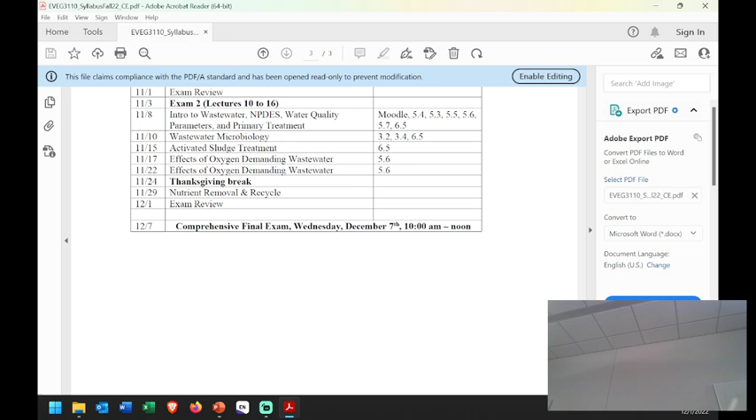Okay, so I think that should be correct. Any doubts, you can always check the LSU website.

All right, so with that, any questions you'd like me to answer? Any topics you'd like to have some review on or anything? Okay, if not, I'll just jump straight into the homework solutions, and then you can get about your studying and everything.

Okay, so problem 1, we have a wastewater treatment plant using an activated sludge system. For primary treatment, 0.350 cubic meters per second of primary effluent. So what we're talking about there is we have some primary treatment, which usually is like the bar rack, sedimentation chamber, kind of the first steps. Then we take that into our secondary treatment, which we consider the aerated tank, waste activated sludge. Usually this sludge just kind of goes to waste or to possibly... yeah, we're just not going to talk about that, it's not relevant. Okay, so this is our typical system.

That means the primary effluent is this stuff coming in here, right? So this is the primary treatment, this is the primary effluent, and that's what we're talking about. So from here, we're given Q is 0.35 cubic meters per second. The mixed liquor, that's referring to X inside here, that's 2,500 milligrams VSS per liter. We're also given the RAS, the return activated sludge concentration, so XR is 10,000 milligrams per liter. We're also given the substrate concentration of the primary effluent, that would be S influent, that's the 220 milligrams per liter.

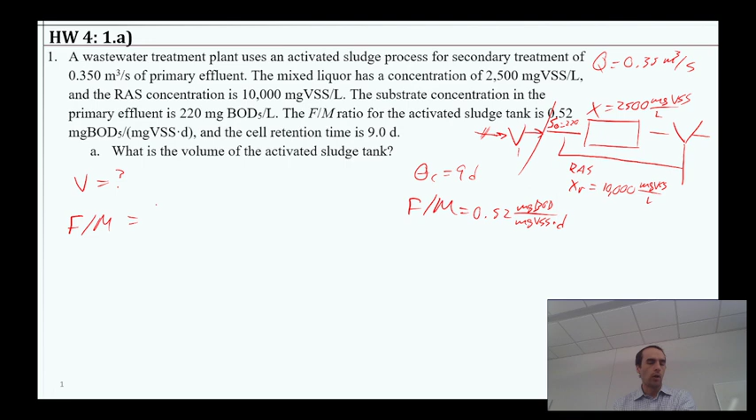Okay, so with all that, part A is asking what is the volume in this tank. And if we take a look, we have in our F to M equation a pretty handy way to calculate that. So it's our equation for the food to mass ratio. Essentially, it's how much food is in this tank, right? So the volume of it will matter. This is Q times that incoming substrate divided by the volume times X.

So we can simply rearrange and say the volume is equal to Q S naught divided by F/M. Now remember, this is just one variable here. We're not multiplying by M, dividing by F, any of that. We're just keeping it F/M right there.

So then with that, we can put in our terms. 0.35 cubic meters per second times that 220 milligrams per liter BOD, divided by that 0.52 milligrams BOD per VSS.

Per day. And here on the bottom, we also have that in days, so we need to convert that to seconds, or this one to days. But we also have that X concentration we were given, 2,500.

Milligrams VSS per liter. Looking at the units, we still need to convert to get like terms for the time. So I'm going to multiply the top here by how many seconds in a day? 86,400 seconds per day. That'll get us per day units there.

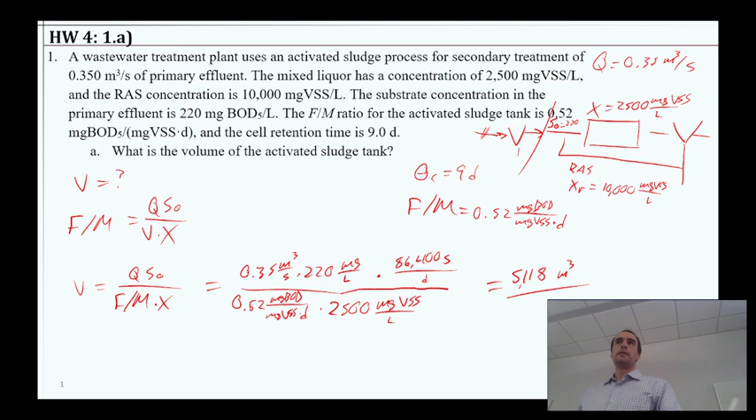Once we put all that in, our volume should come out to 5118 cubic meters. All right, so pretty simple to start with.

Part B says, what is the waste-activated sludge flow rate? So again, just going to draw this up real quick. So what we're looking for is the QW here. That's the question, the flow rate for the waste-activated sludge part. So we're wanting to solve for that.

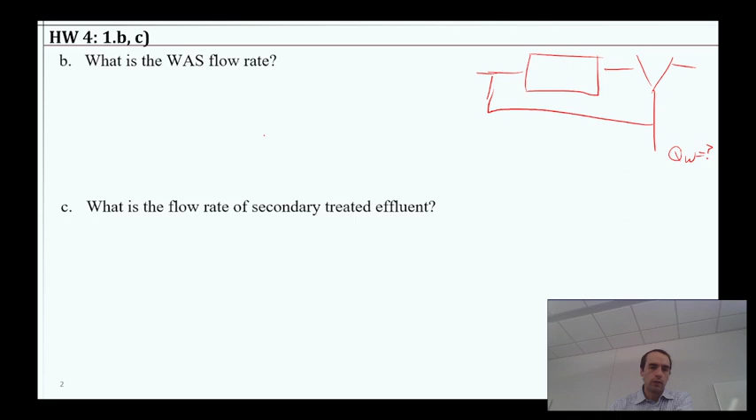We are given a lot of the other things. We have an equation, theta C, if we were to take a look at our equation sheet, that has some information here. So theta C, we know is 9 days, but the equation we're given is Vx divided by QW times XW. So we have basically everything there.

We can say QW is going to be Vx divided by theta C times XW. Now we don't have directly XW, but we were given XR at 10,000 milligrams VSS per liter. And that should be the same exact thing as the XW, right?

So if we have some amount of bacteria concentrated here, it flows down, it splits into two directions. There's nothing that's going to change the concentration by sending it through two different pipes.

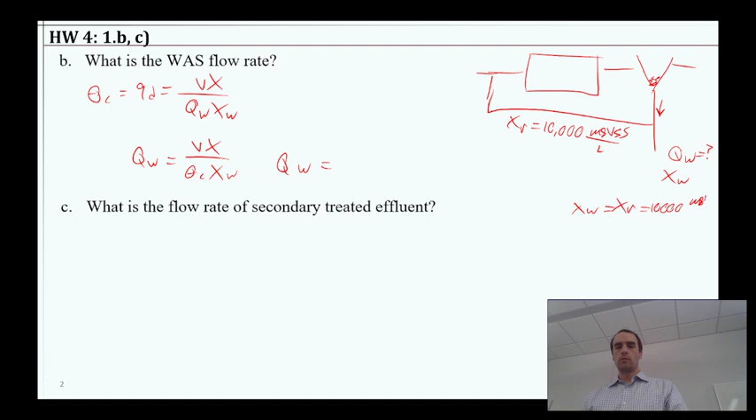So with that, then we can put in the numbers here, and QW, so let's go ahead and just write that out explicitly here. So XW equals XR. So QW then would be 142.2 cubic meters per day.

Since the next question is going to ask us to deal with flow rates again, I'm going to go ahead and convert that to seconds and say that's also 0.00165 cubic meters per second.

So again, I think the major complication for any of these types of problems is probably going to just be understanding the variables, where they go, what they mean from the wording.

Okay, so part C, we say we have what is the flow rate for the secondary treated effluent. So what we're talking about is the effluent here going out of that reactor. It's not going into a landfill. That's what we would be discharging. So QE is the question.

And we know that essentially if Q is coming inside here, we have some Q recycle here. We have QW and QE. Well, Q has to be, since the recycle is kind of internal, Q is going to be QE plus QW.

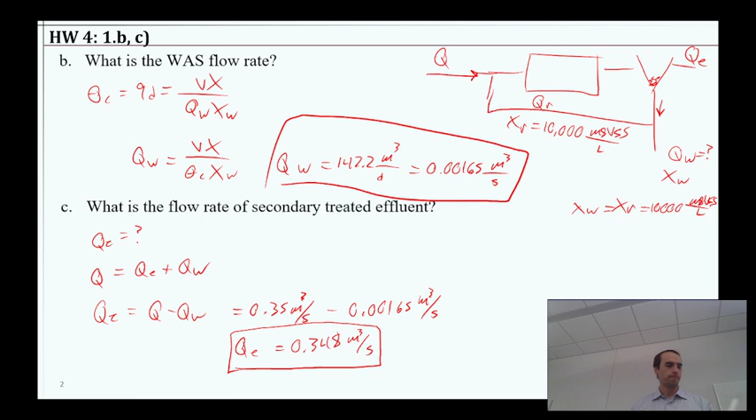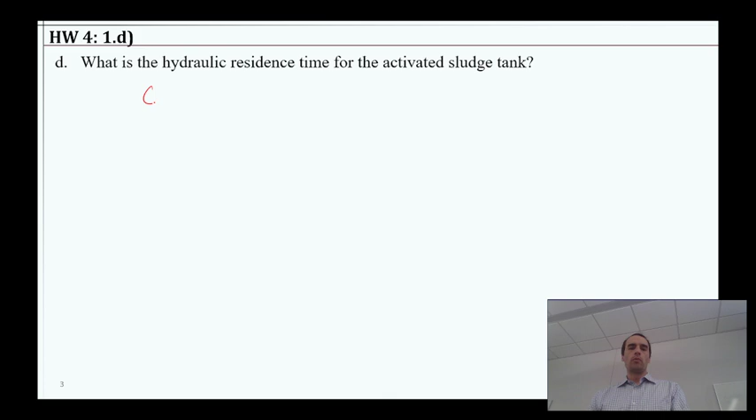All right, so part D says what is the hydraulic residence time for the activated sludge, and we remember that when we're talking about, in this case, it's V over Q. It's definitely not the same thing as theta C, right? It's two different things here. The one's the solids, or the cells, the bacteria cells.

So when we consider our system, there's possible confusion here with the fact that we have recycle, right? So if we have Q and QR going into our tank, you might think to yourself, well, why is this Q, why are we using Q, not Q plus QR?

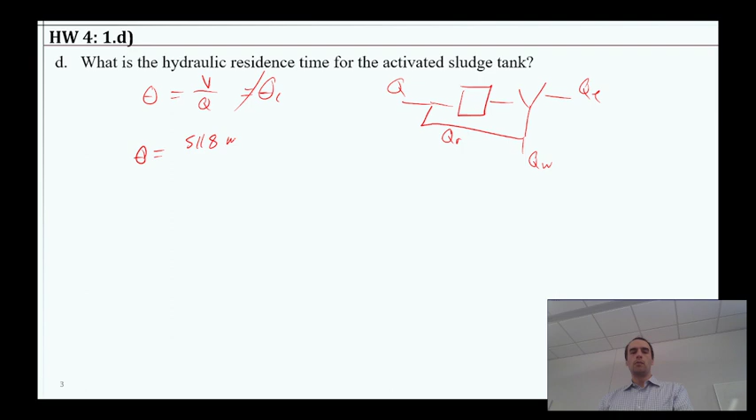Because the answer here should be that 5118 cubic meters divided by our 0.35 cubic meters per second. We can convert that to days if we like.

1 day per 86,400 seconds. This theta is going to be 0.169 days.

The reason we don't have Q plus QR is because essentially all of the volume where we have a reaction happening is here. This volume in terms of reactions is zero elsewhere, so we don't have any important volume there. If we draw a control volume like this, the only space with reactor stuff happening is in that reactor, and the only flow going through it is Q.

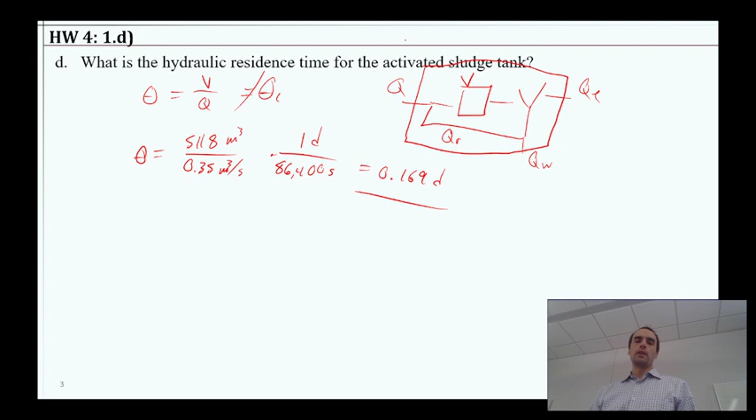Another way to think about it is that QR is adding flow going through the system, but that amount of flow is also coming back around again. That same amount of flow that gets added every time, sees it again every time, so it kind of equals out that way. That's just a little explanation for why we use Q, not the addition of Q and QR.

All right, any questions, issues there?

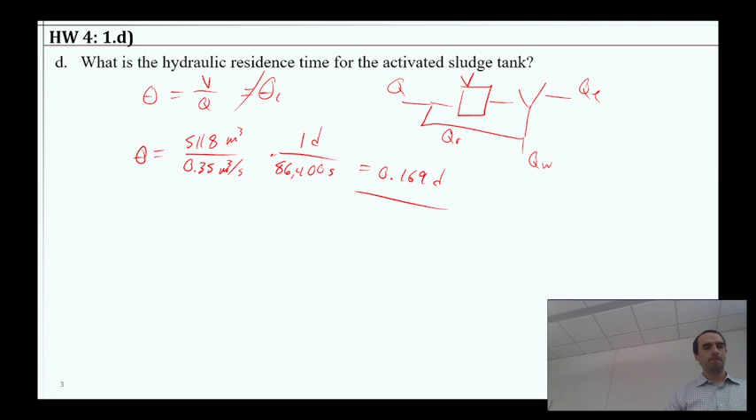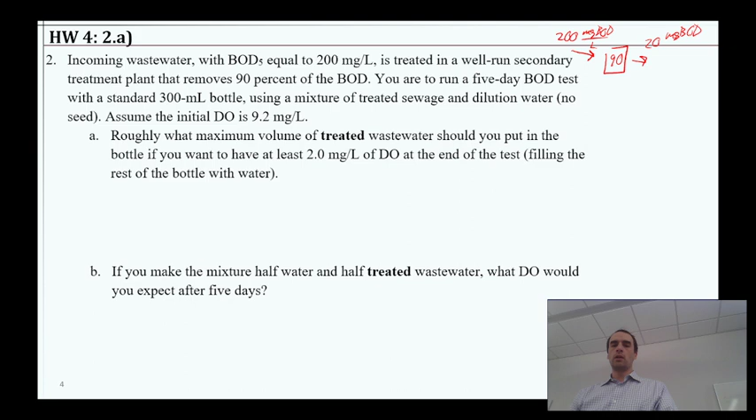Problem 2: we have incoming wastewater with a BOD5 equal to 200 milligrams per liter. It's treated in a well-run secondary treatment plant that removes 90% of the BOD. So we have some sort of treatment here that's going to take away 90%. What's coming in is 200 milligrams per liter of BOD, so what's going out is going to be 10% of that, so 20 milligrams BOD per liter. This could be the confusion right here.

So this is the treatment that's described: 90% of BOD removed. We are tasked to run a 5-day BOD test with a standard 300 milliliter bottle using a mixture of the treated sewage and dilution water. We don't need any seed, so we're not dealing with that complication. We're going to assume the initial dissolved oxygen is 9.2.

So roughly what maximum volume of treated wastewater should be put in the bottle if we have to have at least 2 milligrams per liter of DO at the end of the test when we fill it all the way?

So what we're after is the volume of wastewater in the bottle, and we can get that from the fact that our dilution factor, once we find it, is related to the volume of the wastewater divided by the total volume, which we know is 300 milliliters. So we don't know P, but that equation can get us that volume of wastewater. So where can we find P?

This 5-day BOD test, we know that's going to be DO initial minus DO final divided by P. Since we know each of those factors, we can say P is going to be equal to that. DO initial was 9.2, and DO final had to be at least 2, so that's our maximum waste scenario.

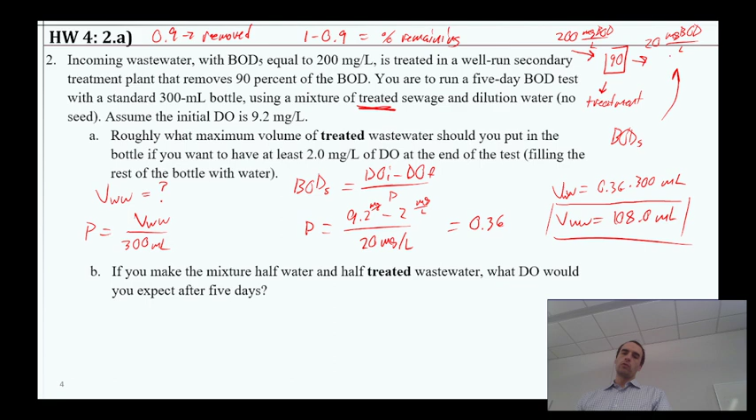I probably should have explained: 1 minus 0.9 will be the percent remaining, because 0.9 is the percent removed, the fraction removed. So it's removing 90%, meaning 1 minus that is the amount remaining. That means we have 20 milligrams per liter BOD remaining after treatment.

Part B says if you make a mixture, half water, half treated wastewater, what DO do you expect after 5 days? We just saw that 108 milliliters was the maximum we could add to have 2 milligrams per liter of DO remaining, so we know it's going to be less than 2, obviously.

So we can check our answer like that. It might reach 0. If we get a negative number, we just have to say 0, because we can't have negative amounts of oxygen.

So when we do the test here, we still have the same BOD, 20 milligrams per liter. We have the same DO initial, 9.2 milligrams per liter, minus what we're trying to find. This time we had a dilution of 1/2, so that's 0.5. We take 0.5, multiply by both sides, and say 9.2 minus the DO final equals 10. We add DO final to both sides, subtract 10 from both sides, and see the DO final is negative, negative 0.8. So that means our measurement is actually 0.

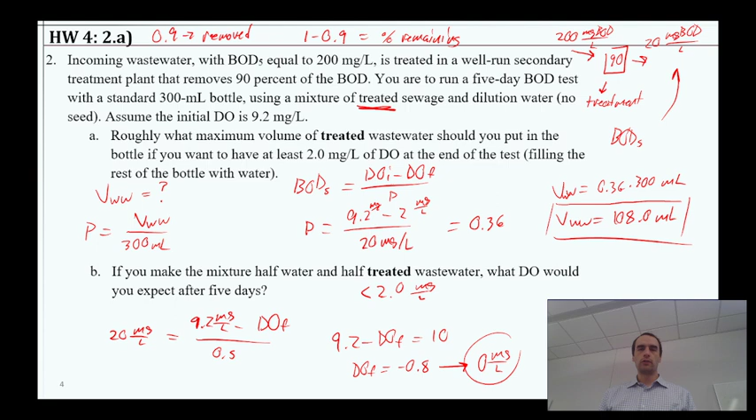All right, so problem 3, another BOD test. This one's run using 100 milliliters of treated wastewater mixed with 200 milliliters of pure water. The initial dissolved oxygen of the mix is 9.0 milligrams per liter. After 5 days, the DO is 3 milligrams per liter. After a long period of time, the DO reaches 2 milligrams per liter and no longer seems to be dropping. We're assuming no nitrification effects here, so everything is carbonaceous.

So part A says, what is the 5-day BOD of the wastewater?

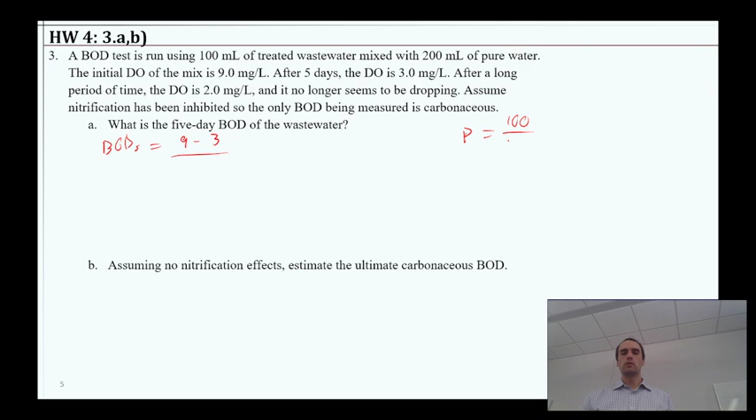This is going to be exactly what we were doing a moment ago. The DO initial, 9, minus the DO final after 5 days, which was 3. Divide that by our dilution factor. Here we had 100 milliliters of this sample and 200 milliliters, so a total of 300 milliliters of volume total. And that gives us a P of 1/3.

So in this case, this becomes pretty simple. 9 minus 3 is 6, divided by 1/3 is multiplying by 3, so that becomes 18 milligrams per liter of BOD.

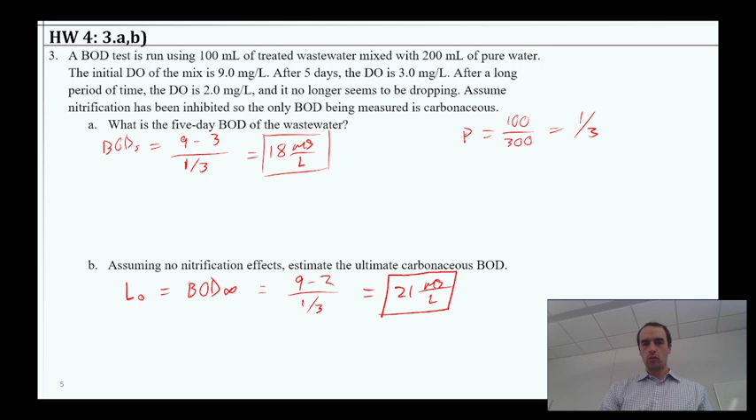All right, so we're going to use essentially this. We'll use this in a minute, this BOD at time t. You didn't need that for this part of the problem. This is kind of what I'm commenting on.

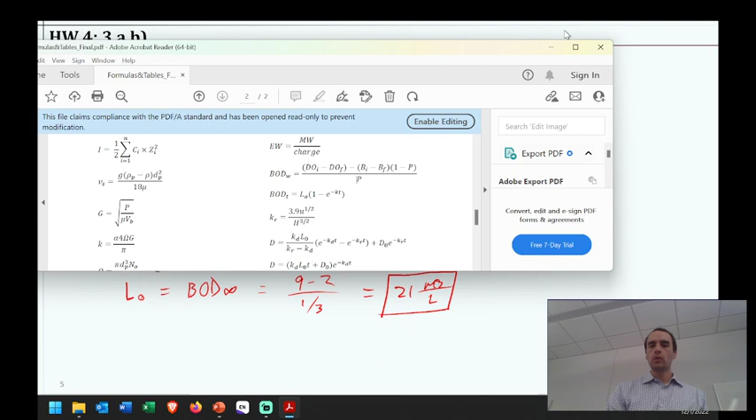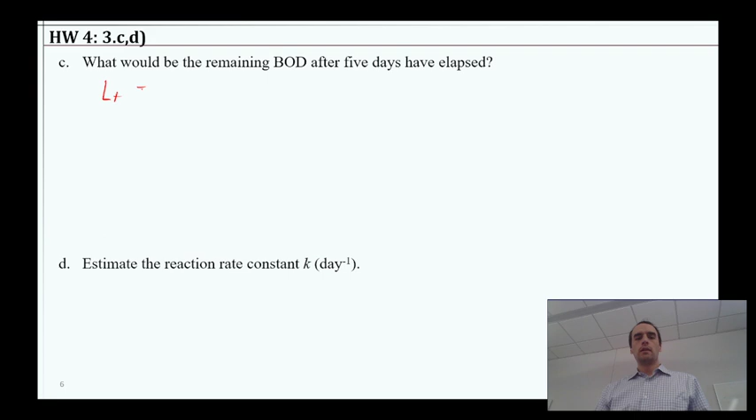So part C says, what would be the BOD remaining after 5 days has elapsed? So BOD remaining, that's LT. That's going to be the ultimate BOD, or BOD at an infinite amount of time, minus BOD at some time t. The BOD infinite here, we could rewrite as L naught.

Which means essentially we've got some amount that has been consumed in the 5 days, or in the 3 days, or however much time we give it, and we're comparing that to how much was there, the ultimate amount to begin with. So really this is just LT is that ultimate, which we calculated as 21 milligrams per liter, minus the 18 milligrams per liter that were consumed in 5 days. So L at 5 is going to be 3 milligrams per liter.

I have a question. Yeah. So the formula sheet has formulas for BOD W and BOD T, what is the difference between the two? Okay, so let me pull that up.

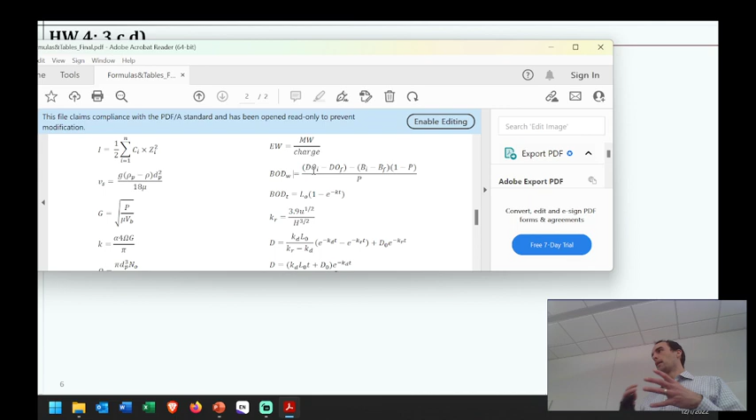Okay, so this BOD w, we're typically talking about a 5-day test, but the W there is in reference to looking at the BOD in whatever wastewater sample we're measuring, compared to the BOD that was in the seed water versus the mixture of seed water, or dilution water, and the waste sample. That's kind of to help us keep the mixture separate from the dilution water in that more elaborate scenario. Usually that'll be for a 5-day test, so you could probably add a subscript 5 if you want to there.

Because you technically could do a 10-day BOD test and use that same formula for that. It's a good question.

All right, so we've got 3 milligrams per liter there for that.

Now part D is going to use that other equation I was just highlighting, that says BOD at some time t we can predict based on these kinetics. So it's BOD sub t equals L naught times 1 minus e to the negative kt. This k being a rate constant of BOD removal. Part D is asking for that k in particular, estimate the reaction rate constant k in per day units. We have calculated each one of these now.

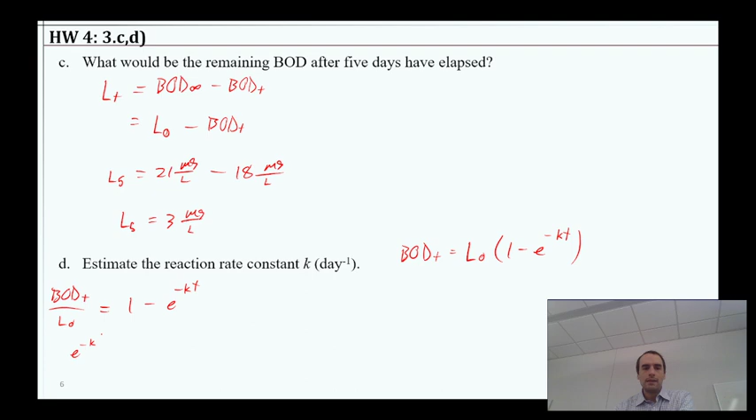And so we can set this up and solve it. I'm going to rearrange for k, so we can just work on getting this k term by itself. I'll say BOD t divided by L naught is equal to 1 minus e to the negative kt. You can rearrange those and say e to the minus kt is equal to 1 minus BOD t divided by L naught.

From there, we can take the natural log of both sides and say that negative kt is going to be equal to the natural log of 1 minus the BOD t divided by L naught. We could divide by negative time, which is going to be 5 days, and say k is equal to that stuff divided by time.

Okay, so when we put all that in, our k should come out to be 0.389 days to the minus 1. That time there on the denominator will give us the per day. The natural log of some quantity is often unitless, or should be unitless, so that works out.

Okay, and by the way, I should probably have filled this in. So this will be negative natural log of 1 minus BOD at time t. That was our 18 milligrams per liter divided by the 21 milligrams per liter, all that divided by 5 days.

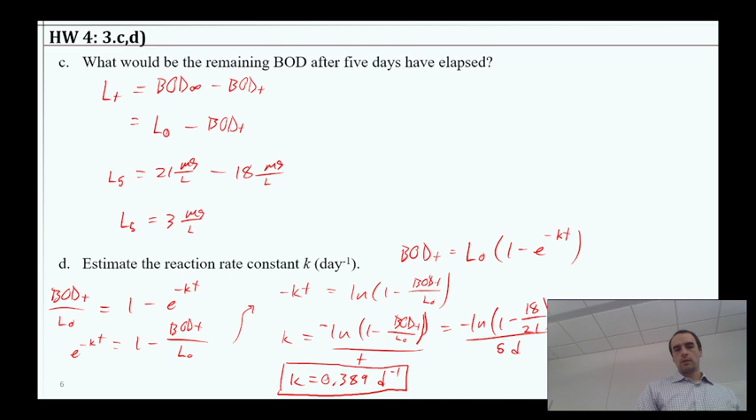All right, so last question we have: suppose the only source of BOD in a river is untreated wastes being discharged from a food processing plant. The resulting oxygen sag curve has a minimum value of DO somewhere downstream equal to 3 milligrams per liter. Just below the discharge point, the DO of the stream is equal to the saturation value of 10 milligrams per liter. The first part asks, by what percent should the BOD of the wastes be reduced to assure a healthy stream with at least 5 milligrams per liter of DO everywhere?

Would a primary treatment plant be sufficient to achieve this reduction? Okay, so right now we've got the oxygen sag curve with a DO, and we need some curve that's going to, starting at the same place, reach a higher value of dissolved oxygen, so a smaller deficit, something like that, where the minimum there would be 5.

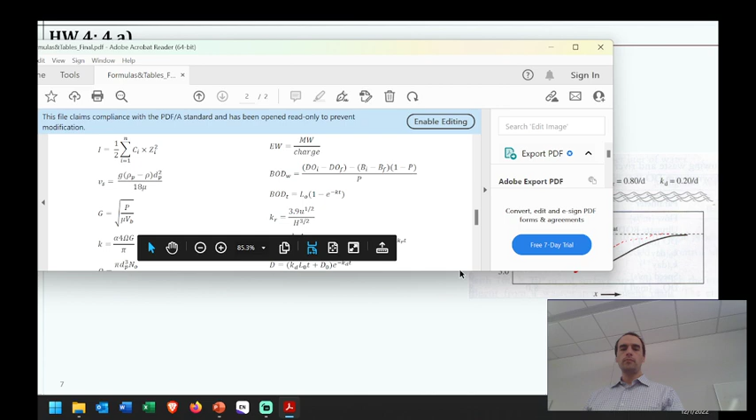Okay, so that's the target here, and let's just write a couple things out that we may care about. So the initial deficit is 0 because we start at saturation. That turns out to be pretty important. If we take a look again at our equations here, I can expand that a little bit.

If we look at the several equations for this type of analysis, including ones we didn't integrate in class, we have a deficit term here. That portion goes to 0 in any calculations. Also, for the time at which the critical point happens, there's an initial deficit term, so that whole term goes to 0.

Before we begin, let's see if this simplifies things. If we change the amount of deficit, or the DO at the minimum, does that mean the time will change? This time equation depends on the initial amount of waste, but that's in the same term as the initial deficit. So if that whole thing goes to 0, it really just depends on Kr and Kd, which stay constant for this river. So the timing of the critical point doesn't change, which is quite handy.

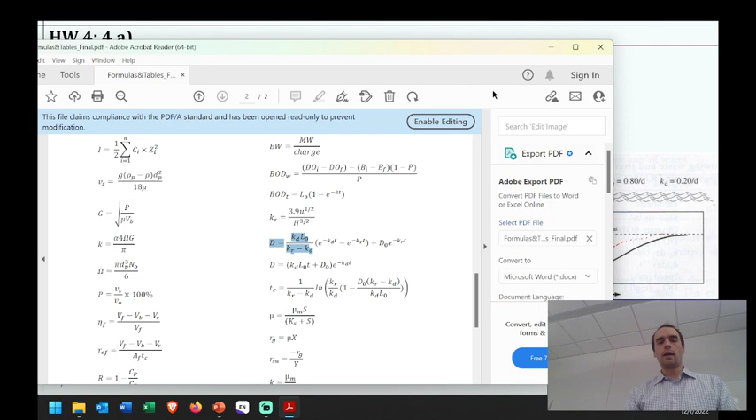Now look at the deficit equation. Essentially we want to know: if we change D, the deficit, from 7 milligrams per liter missing oxygen to 5, what change do we need for L naught? It's directly proportional, a 1-to-1 relationship. If you change one, the other has to change, because Kr, Kd, and e to the minus Kt are all constant. We don't have this extra factor in there.

So it's convenient that we have a starting deficit of 0, because we know we have some L initial for the bad case, and we need some reduction so that we can achieve an L initial for the 5 deficit case. That's the question: how much reduction do we need, going from d equals 7 to d equals 5, to reach a target?

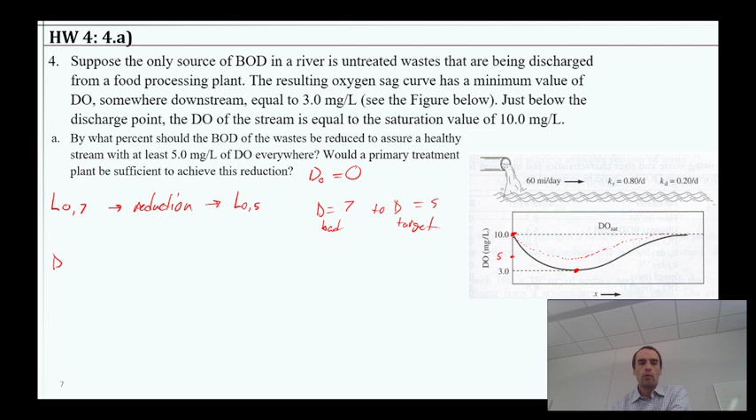So when we look at this equation for deficit, here it is: Kd times L naught divided by Kr minus Kd, times e to the minus Kd t minus e to the negative Kr t, all plus the D naught term that goes to 0 times e to the minus Kr t. That means any change in D, or any change in L naught, is essentially going to be the same proportional change, because they're directly proportional in the equation, and everything else is constant.

So when we compare the target deficit divided by the bad or current scenario, that's 5 over 7, which equals the L naught target divided by the L naught current. So the target is 5/7 of the current situation, or as a fraction, 0.714. So the target is 0.714 of the initial, meaning we need it reduced by 1 minus that, giving us a reduction of 28.6%.

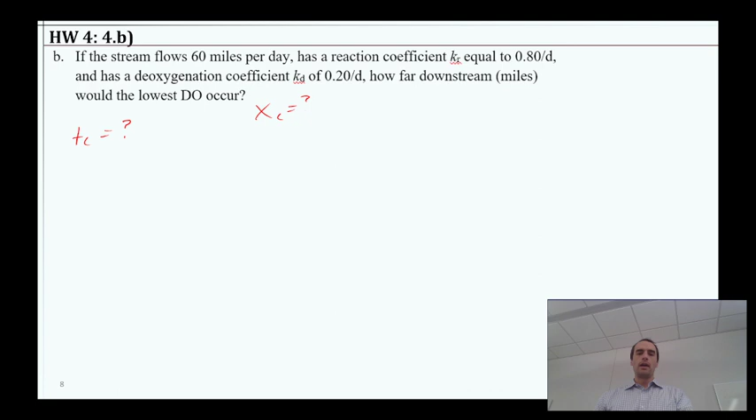So here we're using the Tc equation to find the critical time, and we'll get X at that critical time by saying that's U times time critical, which gives us our distance. So Tc, we have the equation: 1 over Kr minus Kd. We notice Kr is not equal to Kd, so we're fine to use these equations.

Multiply this by the natural log of Kr over Kd, times 1 minus, and then we have this d naught times some other stuff. For the sake of brevity, I'm just going to say this goes to 0. So it's really just the natural log of Kr over Kd.

So if we put those numbers in, we should get a critical time of 2.31 days. That's going to mean we can multiply this by the 60 miles per day traveled by the river, which gives us a distance of 138.6 miles downstream.

This is untreated waste from a food processing plant, and they've made sure they're not discharging anything below saturation, so they have no oxygen deficit. If they're trying to be sneaky by oxygenating their waste stream before discharging, then the worst case of their oxygen sag curve happens nearly 150 miles downstream. You might be able to see how you could potentially get away with that. That's kind of an interesting thought here.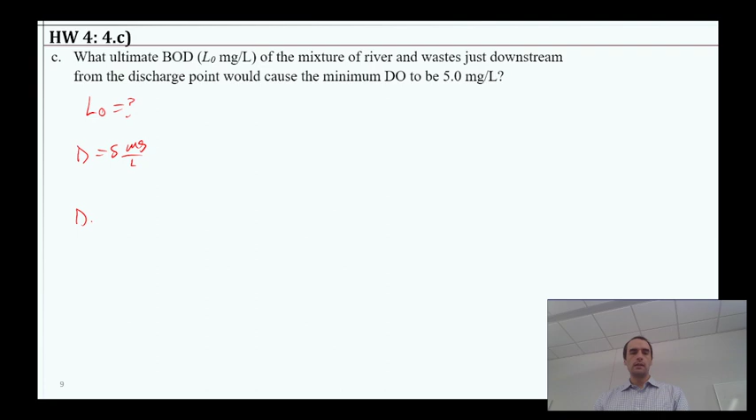We can use our equation again: D equals KD times L naught divided by KR minus KD. We have that other equation for use when KR equals KD, but that's not the case here, so we use times e to the minus KDT minus e to the negative KRT, plus the D naught that goes to 0. Using that, we have all the values now, except we know D is 5, and we're solving for L naught. It's just a bit of algebra from here.

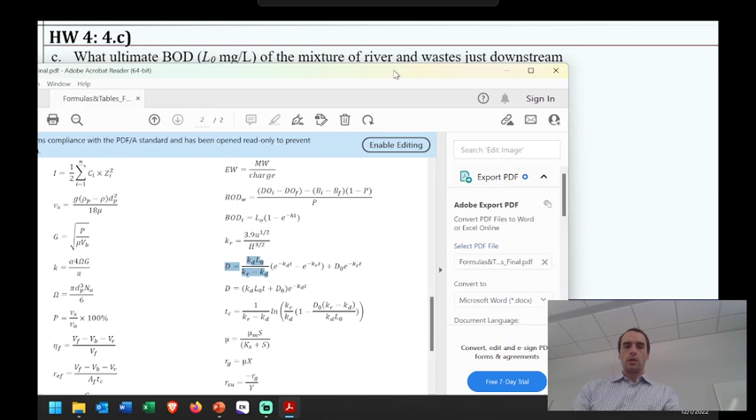And we should get a value of 31.75 milligrams per liter. Now, if you had used the other equation for D here, the one for when KR equals KD, you're not supposed to use it in this condition, but if you did, your answer would be about 17 milligrams per liter or thereabouts. So you can check your own work if that was something you did, and that's why you would have gotten the wrong answer.

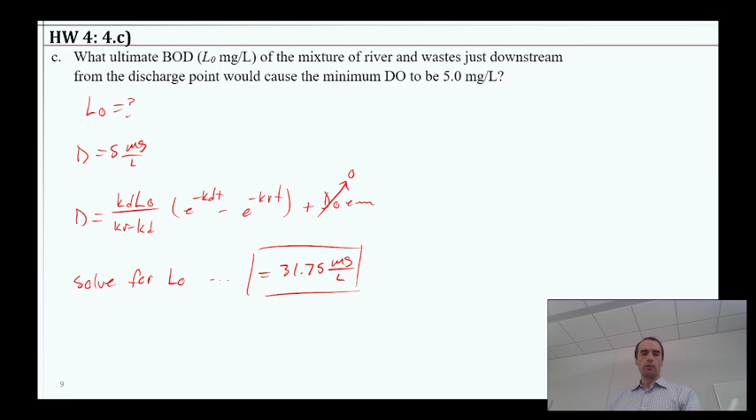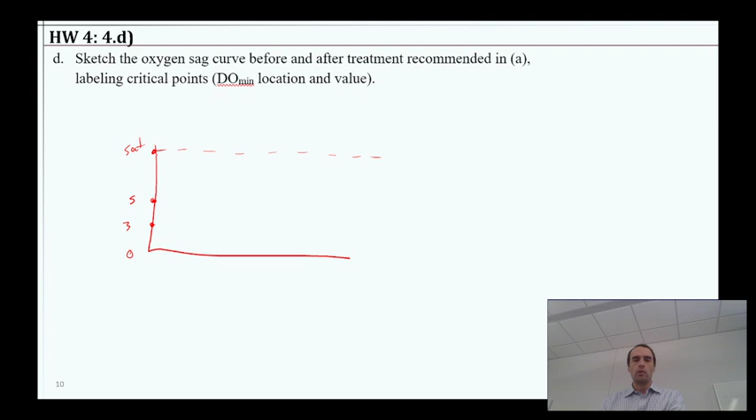Last, it says sketch the DO curve. We kind of already did this, but basically we have some saturation value, I think that was 10 milligrams per liter. We have the 3 and the 5 points here, and so initially it looked something like this, where that would be our 2.31 days. So this x-axis would be time or distance, or it would be 138.6 miles. And then after the change, it looks pretty similar, where we have a minimum point, same time, same distance, just a different spot.

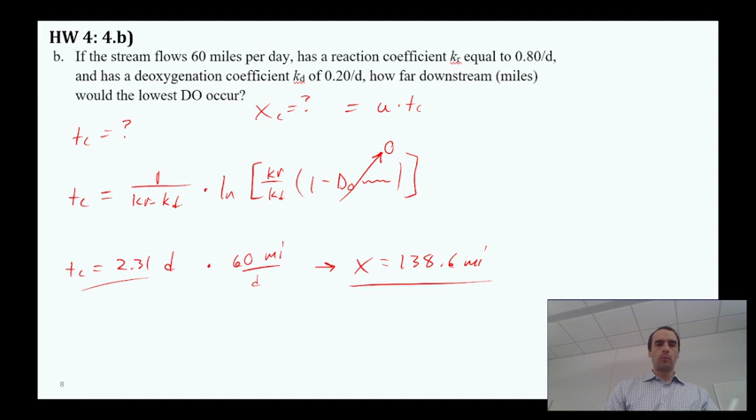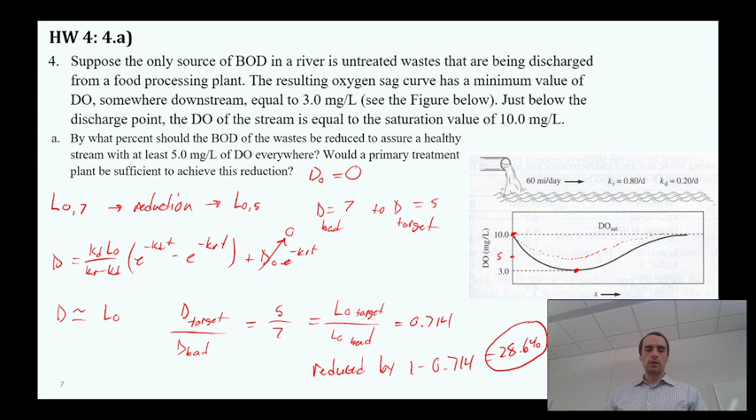To answer the second part of part A, would a primary treatment plant be sufficient to achieve the reduction? If you only have to reduce it by 28%, there's a pretty good chance that primary treatment, just some sedimentation, usually removes a decent amount of stuff because there's some solids that can settle typically. So actually, yes, that would probably be a pretty cheap and effective solution for their situation.